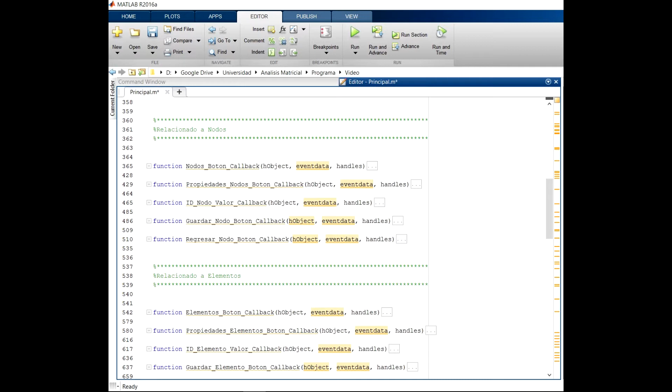We are students in the last year of civil engineering. We developed an algorithm using MATLAB code that can be used to solve and calculate two-dimensional trusses. Some of the main features of the software are use of different material properties, use of different section properties, entering data about its geometry, connectivity, and restraints with an interactive interface for the user, and importing from the software's

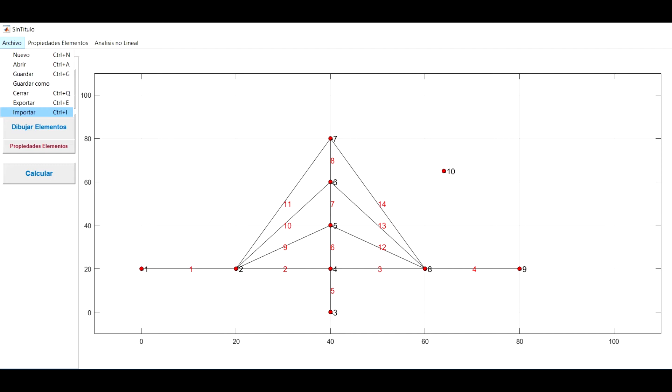app. The user can save each job to open it later or check previous trusses from other files. The results of displacements, forces, geometry, and section properties can be exported to an Excel file to print the data or manage it. To run the program, you need to open the MATLAB script and run it.

In the first window, the option appears to introduce the properties of the material that will be used for the analysis. Unlimited materials can be introduced, but the first one will be assigned to each element created. The next step is to input the sections. In the same way, the first section will be assigned to all the elements, but it can be changed.

After that, the user can proceed to draw the truss or import it from SAP. To draw in the interface, the user first has to place the nodes of the truss. If any node is incorrect, it can be erased by pressing a right click with the mouse.

The next step is to assign the node properties like its coordinates, nodal forces, restraints, and node displacements. Any change must be saved before changing the properties of another node, and every saved change will appear in the plot to show that it's correctly applied.

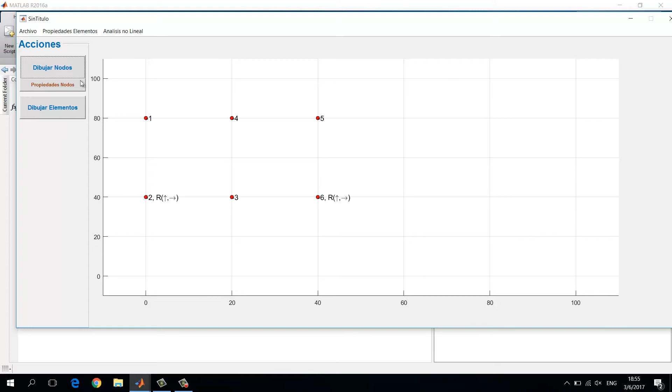Then the user must change the action in order to draw the elements between the nodes. The order of the nodes and the elements does not have any restrictions, but following an order is always recommended.

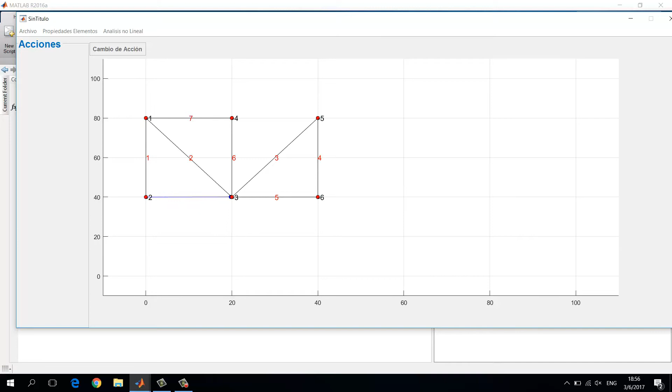Then the user has to return to the main menu and there can choose the element properties. In this section, the user can change the material and the section of any element. And also the user can input conditions about nodal force like temperature and length variation for each bar, and distributed force with the coefficients of a polynomial equation. In the same way, any change must be saved to be applied.

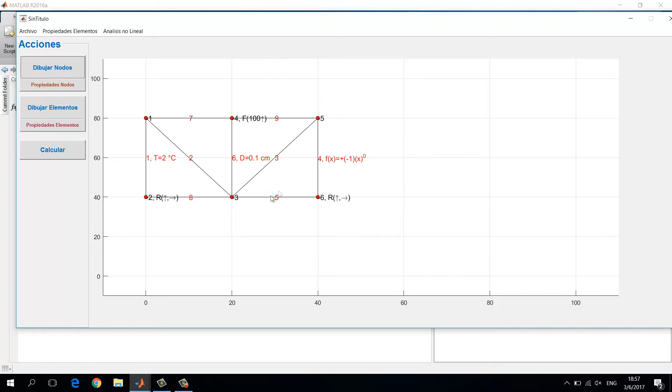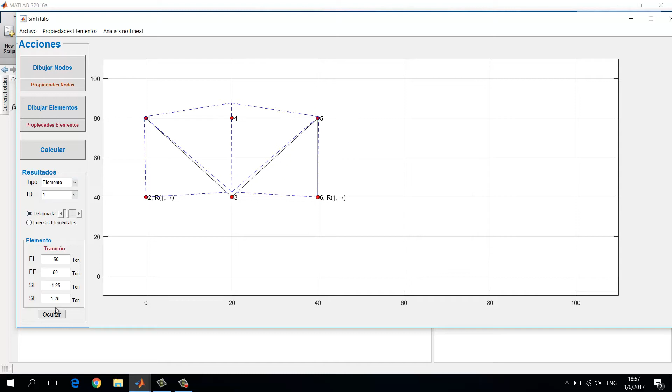Finally, for the calculation, the user has two options. On the one side, a linear analysis can be made using the forces that were input in the previous steps. The results will be presented for each node with the reaction forces and its displacement in global coordinates. For each bar, the user can view the forces and the stress applied. An additional thing is that the user can change between the forces plot and the displacement truss plot.

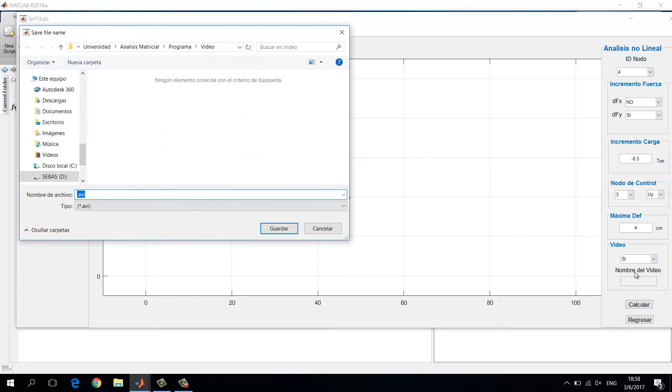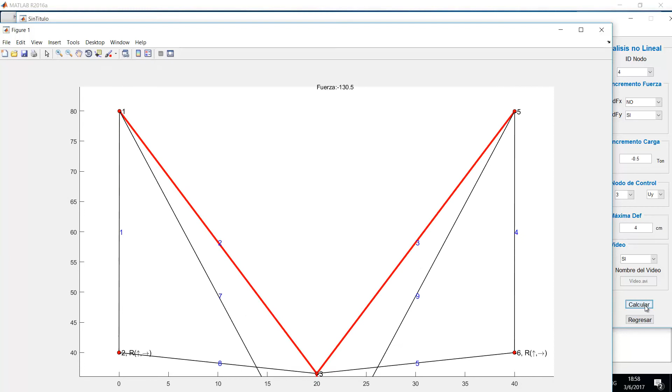On the other side, the user can make a non-linear analysis of the truss, giving an increment of load in any node. The user must select a control node to determine a limit deformation when the analysis will stop. All this process can be recorded in a video at the end of the analysis. Also, the software presents a stiffness plot of the control node. All this information about geometry, restraints, and forces can be saved into a MATLAB file for future revisions.

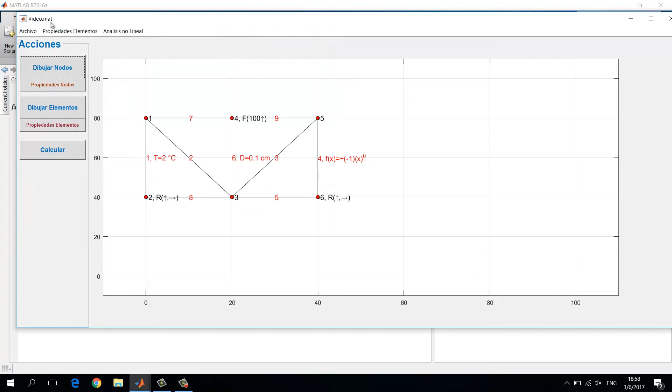Here you can see an example of a more complex structure in which we apply a linear analysis and a non-linear analysis.

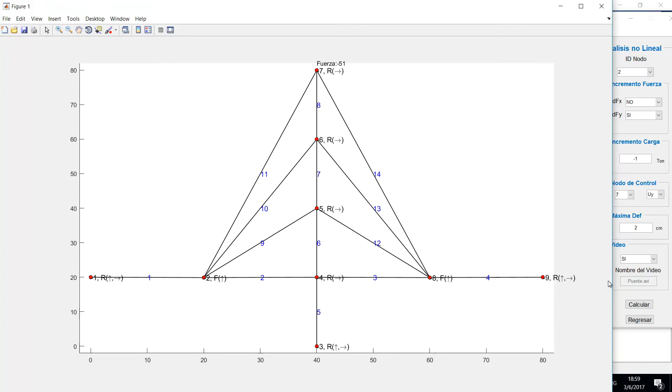If we choose to export the results to an Excel file, the software will ask us where we want to save it, and we will need to give it a name.

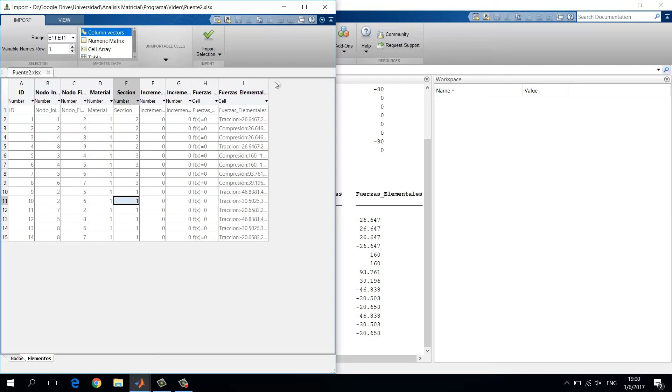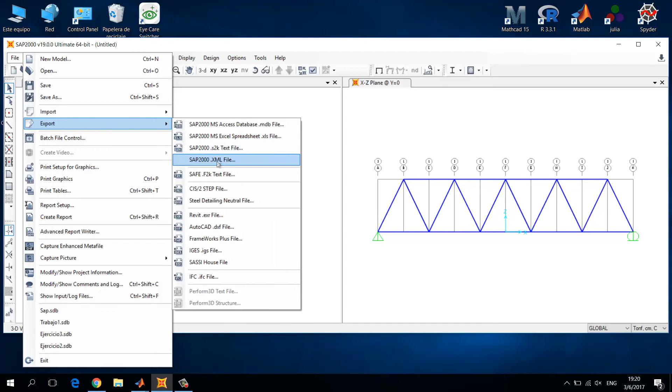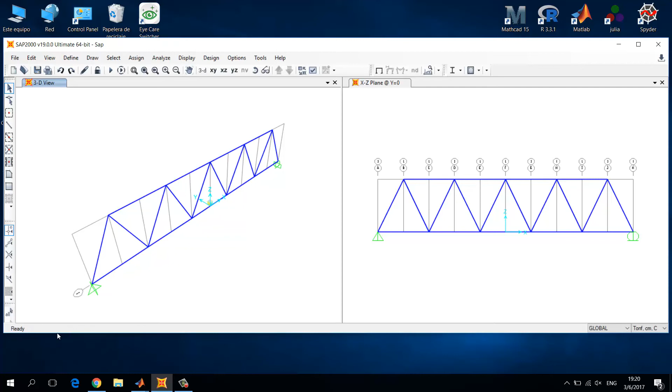One of the features of this program is that we can import data from SAP. Here we have to export data of coordinates and restraints. Then we click the Import menu and select the file generated from SAP.

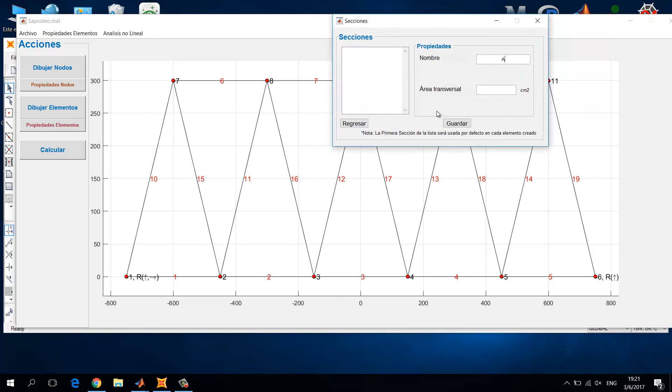As we can see, the plotted structure has the same features of restraints and coordinates as the structure in SAP.

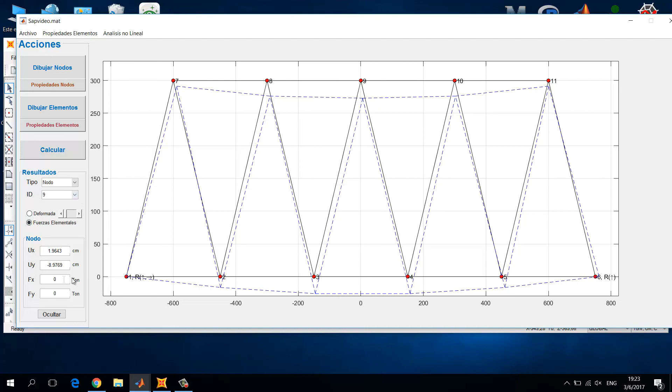This program has some strong points; however, it's just a first draft. We want to improve the input data and add more structures to be processed. A future version will include structures such as beams and frames that can be calculated with a matrix analysis method.